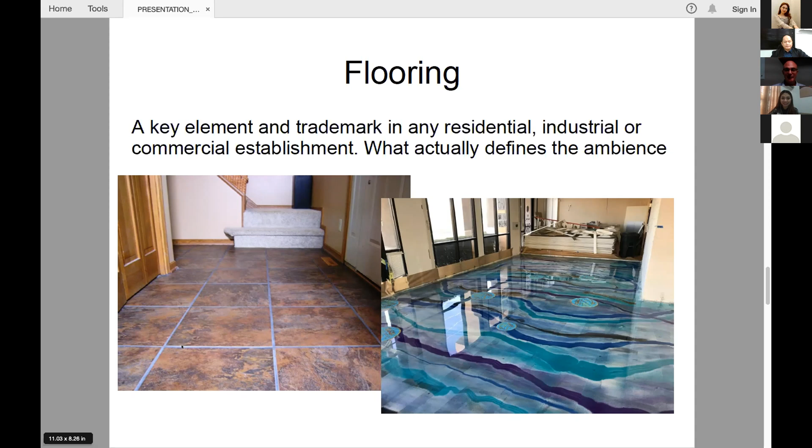And then for the use that it is designed, flooring is defined like our basic needs, from cold or warm climates to wet or dry environments. Meaning, for example, bedrooms have wooden flooring, especially in colder areas in the world, and have tile flooring in warmer areas in the world. That actually is a climate given.

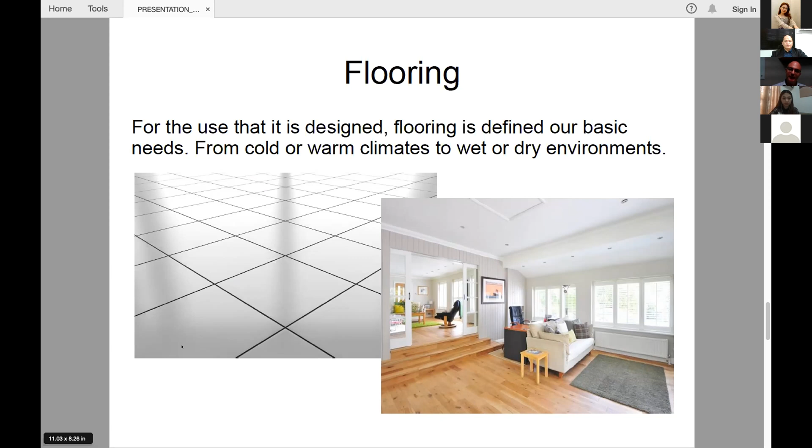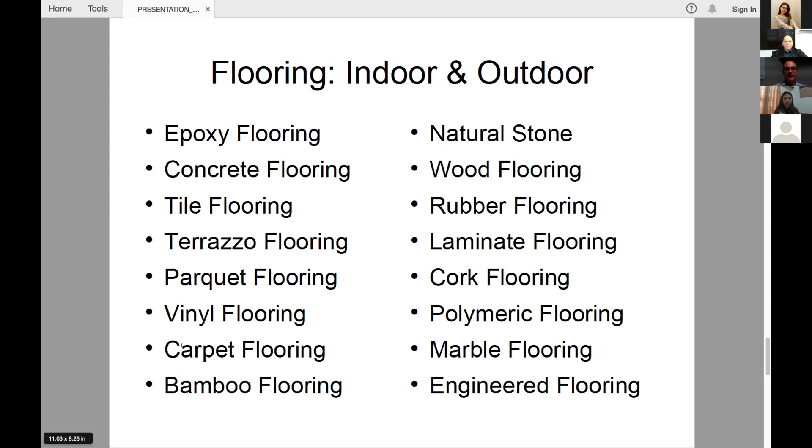Just as an example. So there is a lot of different flooring: indoor, outdoor flooring, concrete flooring, tile flooring. Here we made a small list of possible flooring: cork flooring, carpet flooring, bamboo flooring, natural stone, rubber flooring, engineered flooring, and many more. And I'm actually now very curious to hear what the industry stakeholders tell us about when to use what.

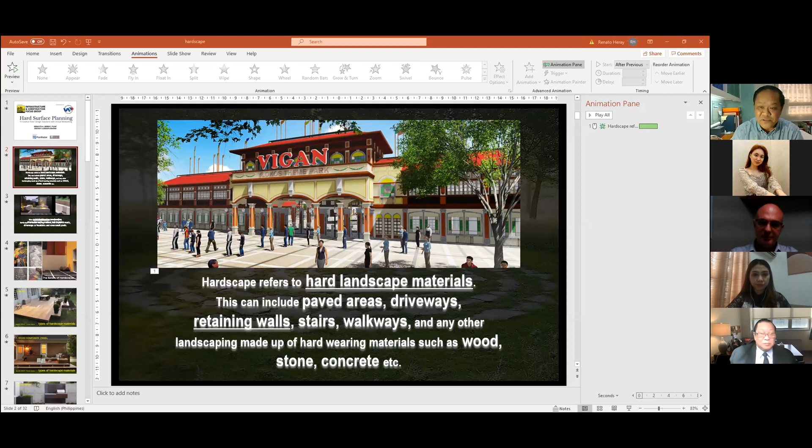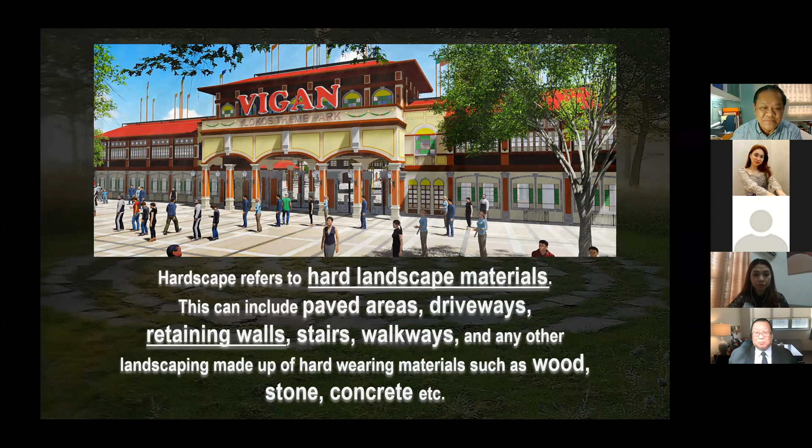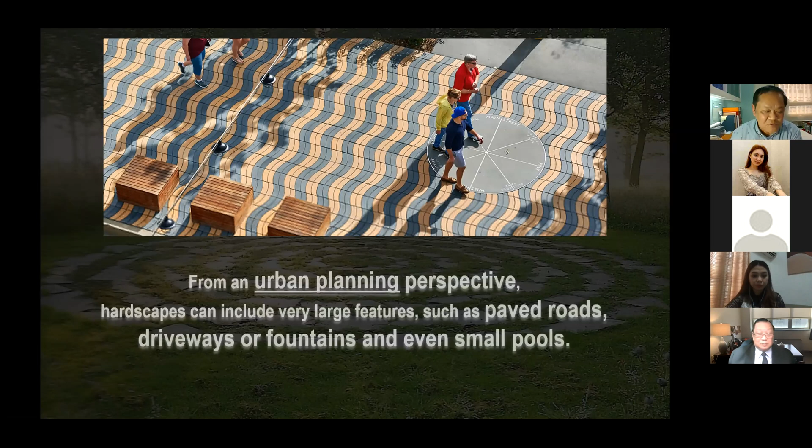Hardscape refers to hard landscape materials, which include paved areas, driveways, retaining walls, stairs, walkways, and any other landscaping made up of hard-wearing materials such as wood, stone, and concrete. From an urban planning perspective, hardscape can include very large features such as paved roads, driveways, or fountains, and even small pools. Most water features are hardscape because they require a barrier to retain the water.

Now, the beauty of hardscape. In landscape design, hardscape are essential non-plant elements in your landscape that complement your greenscapes and provide attractive functionality to your outdoor sanctuary. There should be planning in the hardscape surface, like the choice of hardscape materials, wherein every hardscape project is constructed to make it as personal and customized as possible.

Allow me to give you some types of hardscape materials. One of them is wood. Perhaps this is the first material that comes to mind when dreaming of a deck design, and perhaps the most popular hardscape material, but a wood hardscape won't stand the test of time through weather. But of course, a well-maintained wooden deck sure is nice to look at, or even nice to lounge on.

We have as well wood composite panel as a hardscape material to give you the aesthetic appeal of a wooden surface. Consider whether your feature will be experiencing occasional or high traffic use.

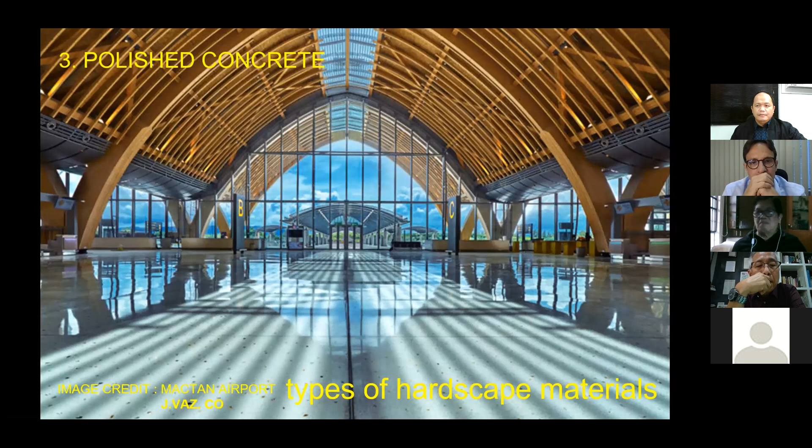We have concrete. Recent years have seen the rising trend of polished concrete floors indoors, but concrete is also a long-time hardscape material. You might not even notice concrete hardscape floors in your homes anymore, in the garage, driveways, walkways, or even in a courtyard. We have as well stamped concrete, which is commonly used now. This is how it was being done.

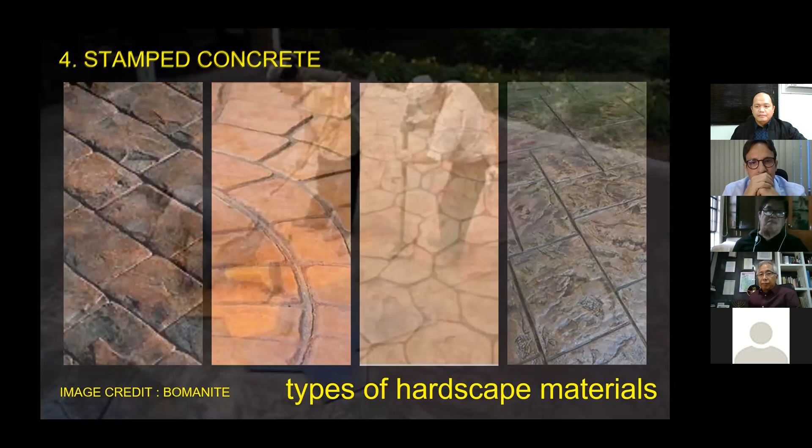We have as well bricks. Like wood, bricks are a hardscape material with classically pleasing aesthetics, but bricks and wood also have the drawback of being naturally vulnerable to wear and tear from weather.

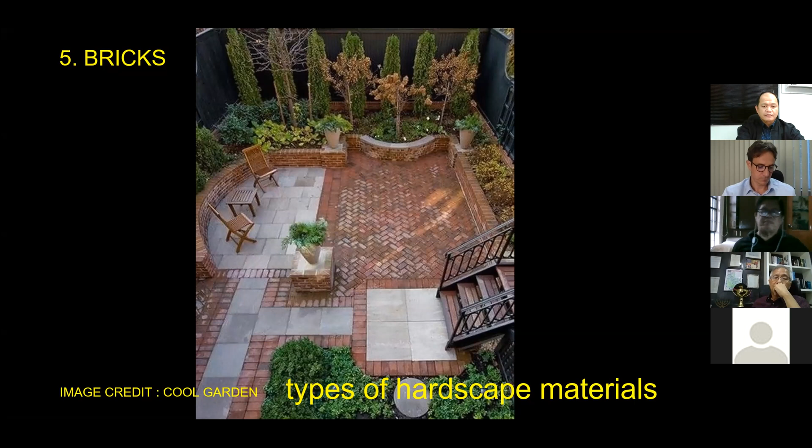We have loose stones as a hardscape material. Loose stones are most frequently associated with gravel paths and driveways, but they're actually an incredibly versatile element in exterior design. A loose stone hardscape feature can be entirely paved as a patio, a garden border, or a garden itself. We can use loose stone as a focal point or an element in the landscape, such as cobblestone.

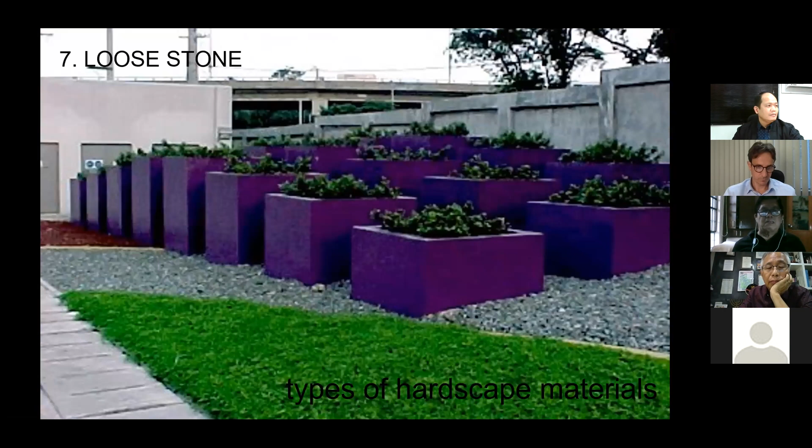Then we have pavers, which have been specifically designed for pavement. You might describe pavers as tiles that are meant to be walked upon and should be strong enough to bear the burden as one of the floor design solutions.

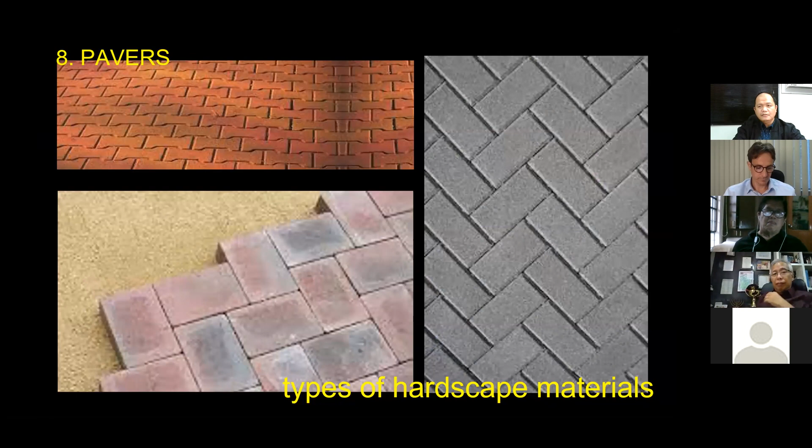Of course, this is much better, at least water can penetrate, wherein we will have just sand underneath. We used bricks in this project, wherein we have as well an innovative design using the traditional material. Hopefully, this will be in Baguio, in Burnham Park, using it as a design with that material.

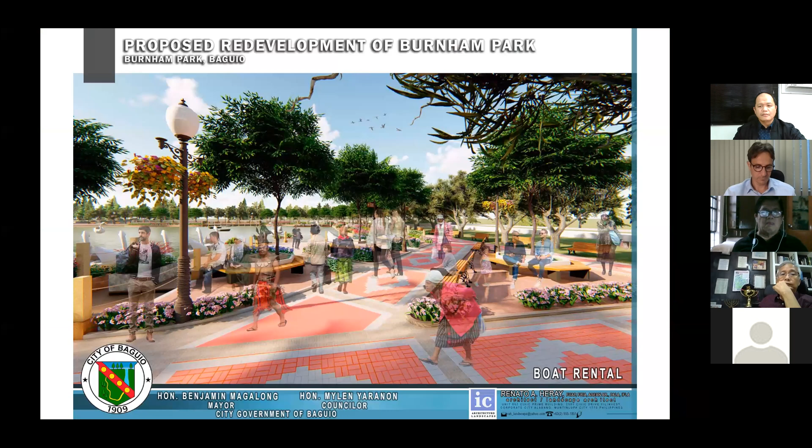Pavers were used as well in De La Salle University. But then, we have no ponding of water because it penetrates in the sides of the pavers.

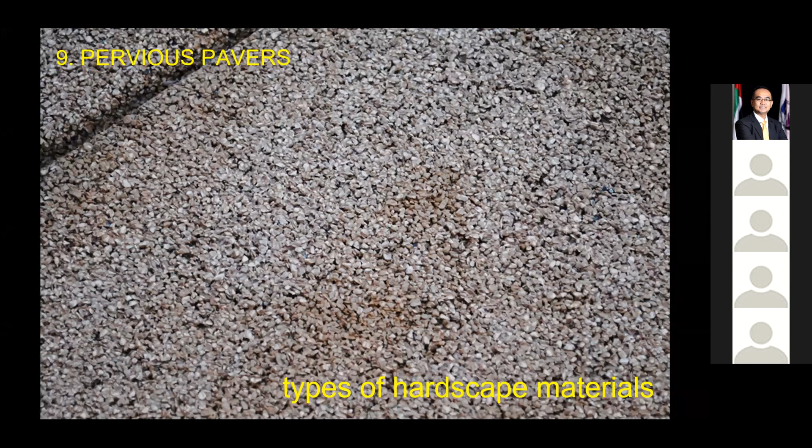Another paver option being used is the permeable paver, wherein water can penetrate directly. So pouring water, you can see the water flows through, as well as with Grasscrete.

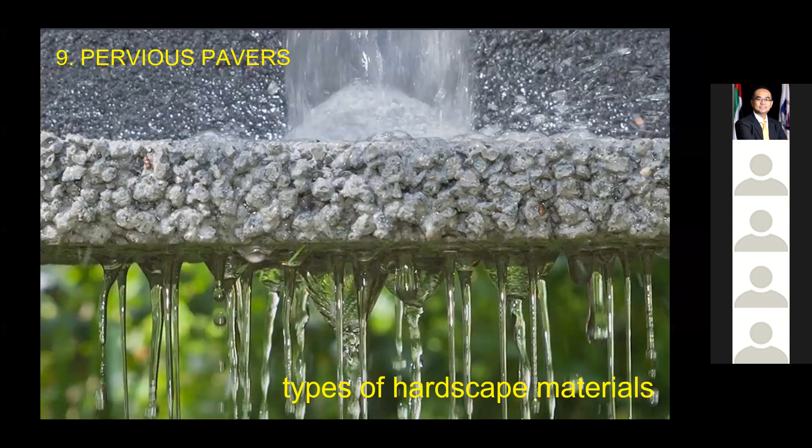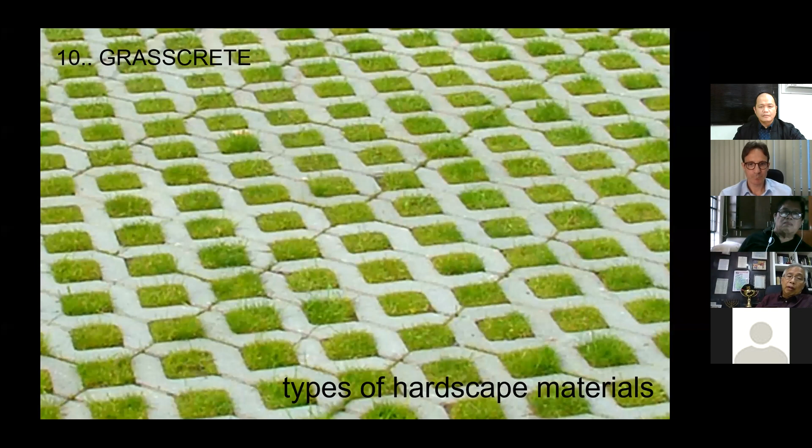These are permeable. They allow water to infiltrate through surfaces that would normally be impermeable. With this, rain may recharge the groundwater table, and air may pass to nourish the roots of grass and trees. Grasscrete is an environmentally friendly solution that offers a pervious pavement for vehicle access as well as parking.

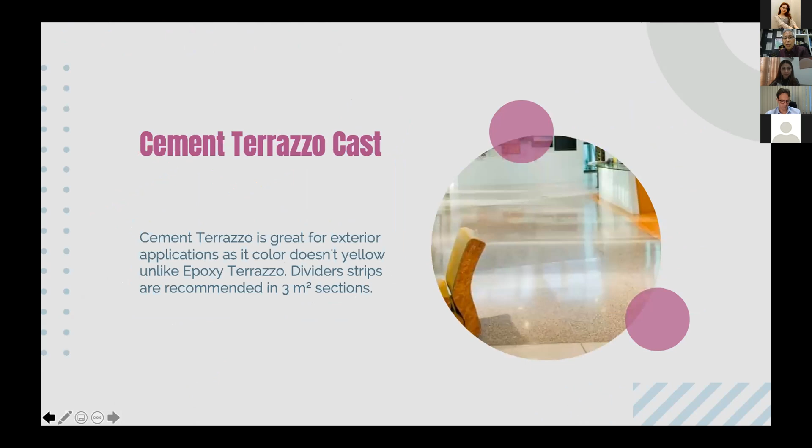That's why we did this in a prefab manner, inserting those divider strips, those aluminum divider strips, 6 millimeter. What we did is simply design that, and here in the factory, in our shop, we already made prefab curved slabs according to the architect's specs. Then we just simply install it back with those divider strips in between.